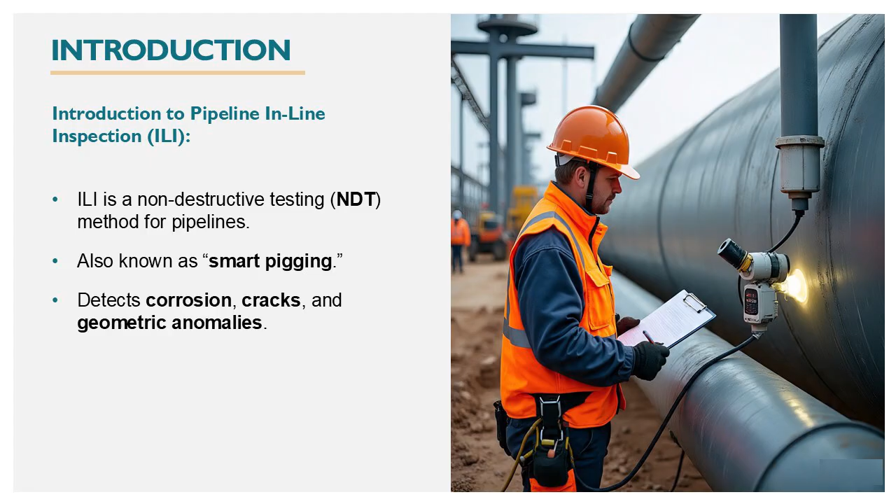Why pipeline inline inspection, or ILI, matters: ILI helps us identify potential issues before they become critical. It's not just about safety, it's also about cost efficiency and regulatory compliance. Early detection means fewer shutdowns and better planning.

Key point number 1: ILI helps to prevent pipeline failures and environmental hazards. It helps detect early signs of corrosion, cracks, or deformation that could lead to leaks or ruptures. Preventing these failures protects the environment, avoids costly cleanups, and ensures public safety. Pipeline failures can be catastrophic, causing explosions, oil spills, or gas leaks. ILI helps us catch problems early, reducing the risk of such incidents. It's a key part of our safety and environmental protection strategy.

Key point number 2: ILI helps to ensure pipeline integrity programs comply with safety regulations. Regulatory bodies like PHMSA, API, and local authorities require regular integrity assessments. ILI provides documented evidence of pipeline condition, helping operators meet legal and industry standards. Governments and industry bodies mandate regular inspections, and ILI provides the data we need to demonstrate compliance. It also helps us avoid fines, shutdowns, and reputational damage.

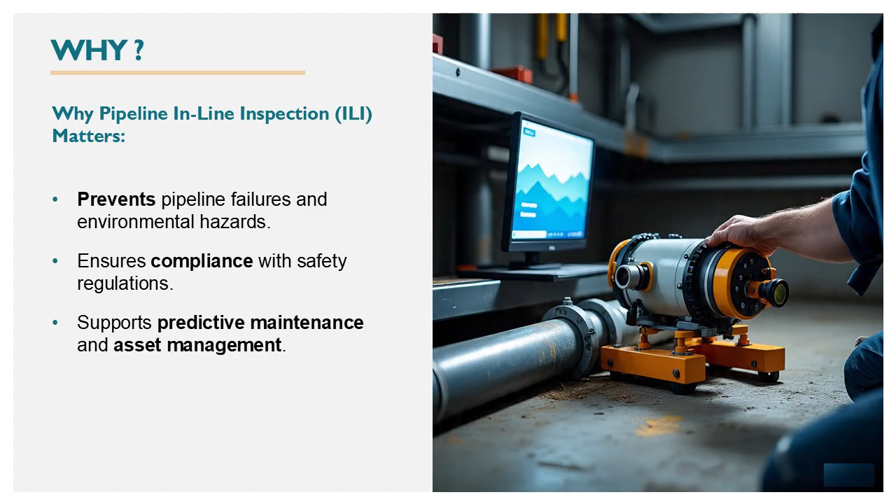Types of pipeline inline inspection tools: different tools serve different purposes. MFL is great for corrosion, to detect metal loss. Ultrasonic testing, or UT, measures wall thickness and cracks. Caliper tools are used for geometry, to identify dents and deformations. Electromagnetic acoustic transducer, or EMAT, and eddy current are advanced tools for crack detection. Choosing the right tool depends on pipeline material, diameter, and inspection goals.

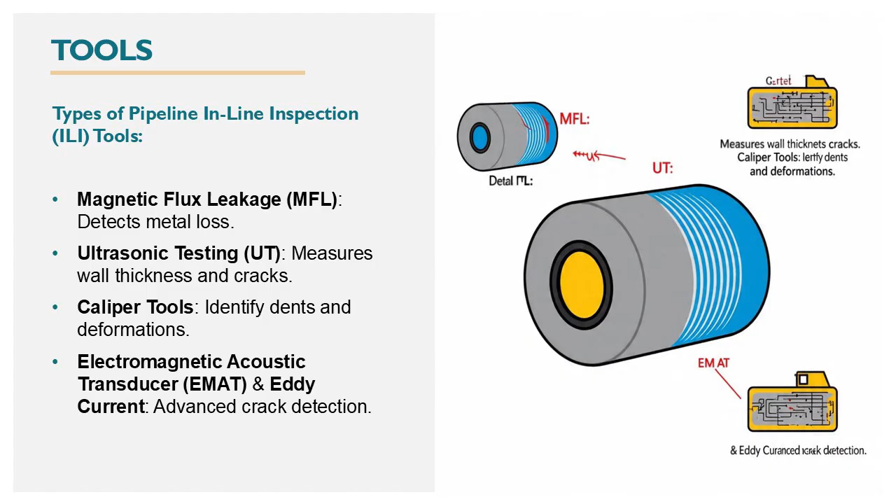For tool type MFL, or magnetic flux leakage: it is enabled to detect defects in the pipeline with a maximum wall thickness of up to 31 mm, able to detect defects such as metal loss and corrosion. This measurement type is called indirect, or magnetic flux leakage. Medium requirement to conduct this inspection is dry or liquid material. Compatibility to measure or detect is ferromagnetic only. The advantages of this MFL inspection method are: fast, well established, and good for corrosion detection. The limitations are limited crack detection and saturation issues in thick walls.

For tool type UT, or ultrasonic testing: it is enabled to detect defects in the pipeline with a maximum wall thickness of 40 mm and above, able to detect defects such as wall thickness, cracks, and laminations.

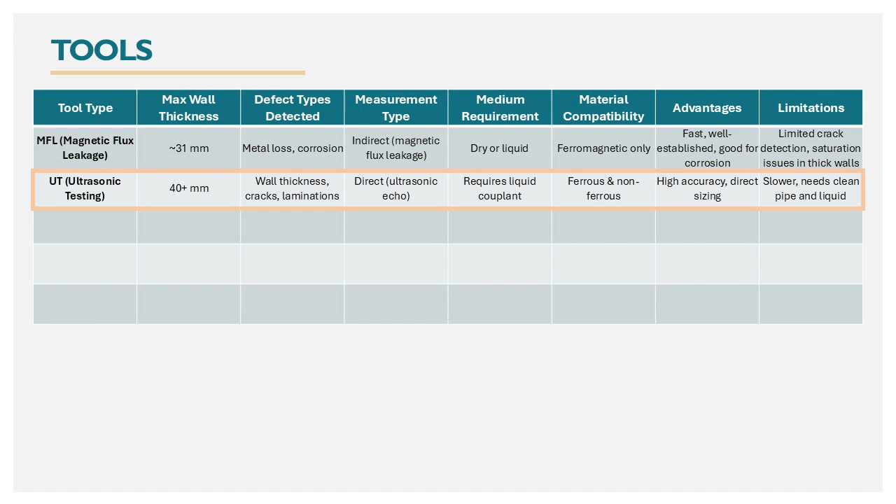This measurement type is called direct or ultrasonic echo. Medium requirement to conduct this inspection requires liquid couplant. Material compatibility to measure or detect is ferrous and non-ferrous. The advantages of UT or ultrasonic testing inspection method are high accuracy and direct sizing. The limitations are slower speed, and it needs a clean pipe and liquid.

For tool type caliper tool, it is not able to detect defects that occur in the pipeline's wall thickness. It is able to detect defects such as dents, ovality, and deformation. This measurement type is called mechanical contact. Medium requirement is any medium. Material compatibility is all materials. The advantages of the caliper tool are simplicity and detecting geometric anomalies. The limitations are that it cannot detect corrosion or cracks.

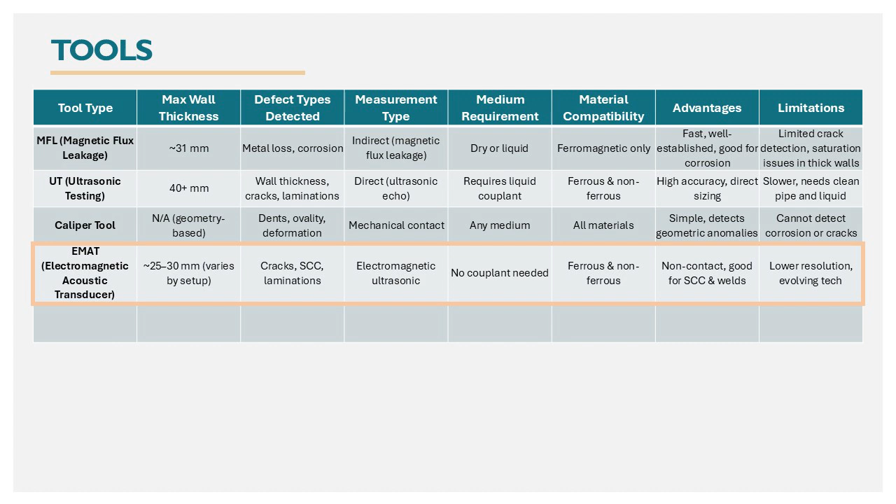For tool type EMAT or electromagnetic acoustic transducer, it is enabled to detect defects in the pipeline with a maximum wall thickness up to 25mm and up to 30mm, varying by setup. It's able to detect defects such as cracks, SCC, and laminations. This measurement type is called electromagnetic ultrasonic. Medium requirement is no couplant needed. Material compatibility is ferrous and non-ferrous. The advantages are non-contact operation and good performance for SCC and welds. The limitations are lower resolution and evolving technology.

For tool type eddy current or EC, it is enabled to detect defects in the pipeline with a maximum wall thickness up to 15% of wall thickness, able to detect defects such as surface cracks, corrosion, and material changes. This measurement type is called electromagnetic impedance. Medium requirement is dry or liquid. Material compatibility is conductive materials. The advantages are sensitivity to surface flaws and no couplant needed. The limitations are limited depth penetration and not ideal for thick walls.

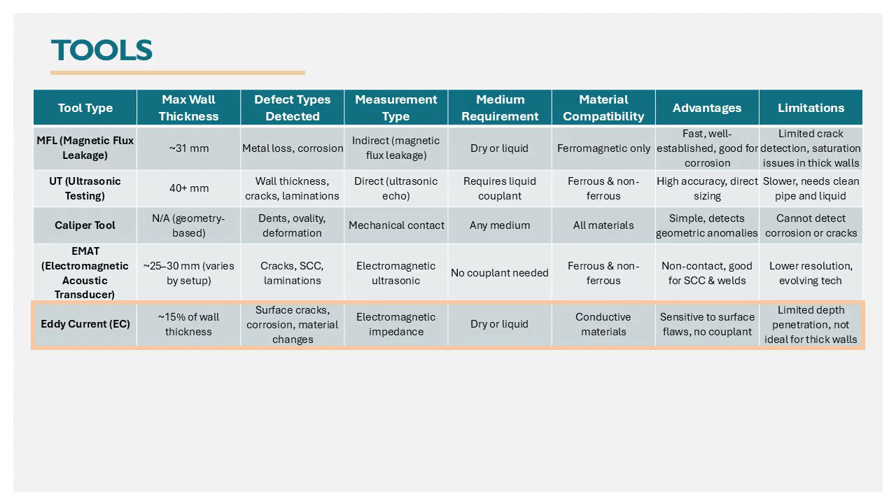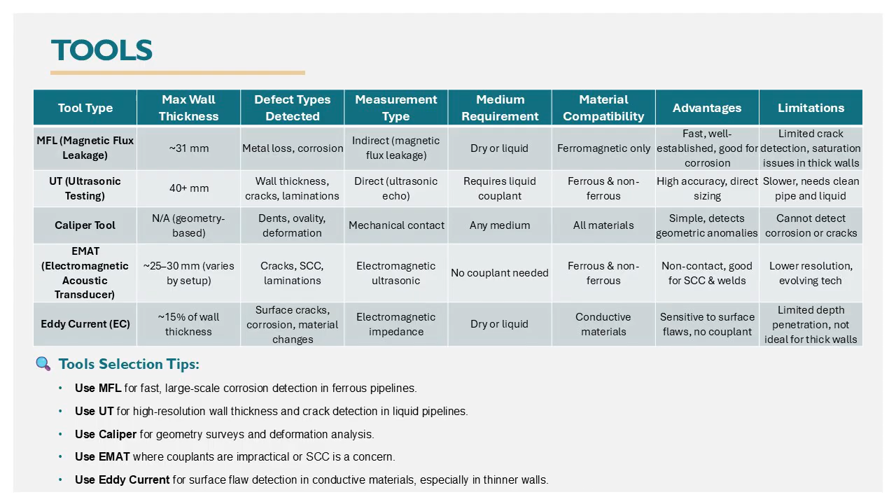According to this table of tools, here are the tips to select the tools. First, use MFL for fast, large-scale corrosion detection in ferrous pipelines. Second, use UT for high-resolution wall thickness and crack detection in liquid pipelines. Third, use caliper for geometry surveys and deformation analysis. Fourth, use EMAT where couplants are impractical or stress corrosion cracking (SCC) is a concern. And fifth, use eddy current for surface flaw detection in conductive materials, especially in thinner walls.

Pipeline inline inspection, or ILI, simple workflow. The ILI process starts with planning and ends with actionable insights. Each step is crucial, from selecting the right pig to interpreting the data and deciding on repairs or monitoring.

Workflow step number 1: pre-inspection planning. Define inspection objectives, review pipeline specifications, assess risks, and schedule operations. Includes coordination with operations and safety teams. This is a critical phase where we define what we want to achieve, whether it's detecting corrosion, verifying pipeline geometry, or assessing integrity after an incident. We also gather pipeline specs like diameter, material, and operating conditions. Coordination with operations ensures minimal disruption.

Workflow step number 2: tool selection and launch. Choose the appropriate ILI tool based on pipeline material, diameter, and expected defects. Launch the tool from a pig launcher and monitor its progress. Tool selection depends on the type of defects we expect, for example, MFL for corrosion, UT for cracks. Once selected, the tool is inserted into the pipeline via a pig launcher. We monitor its movement to ensure it travels at optimal speed and collects quality data.

Workflow step number 3: data acquisition during run. The tool travels through the pipeline, collecting data on wall thickness, geometry, and anomalies. Speed and pressure are controlled to ensure data quality. As the pig moves through the pipeline, sensors collect data continuously. It's important to maintain stable flow conditions; too fast or too slow can affect data accuracy. The tool may also record GPS or odometer data for precise location mapping.

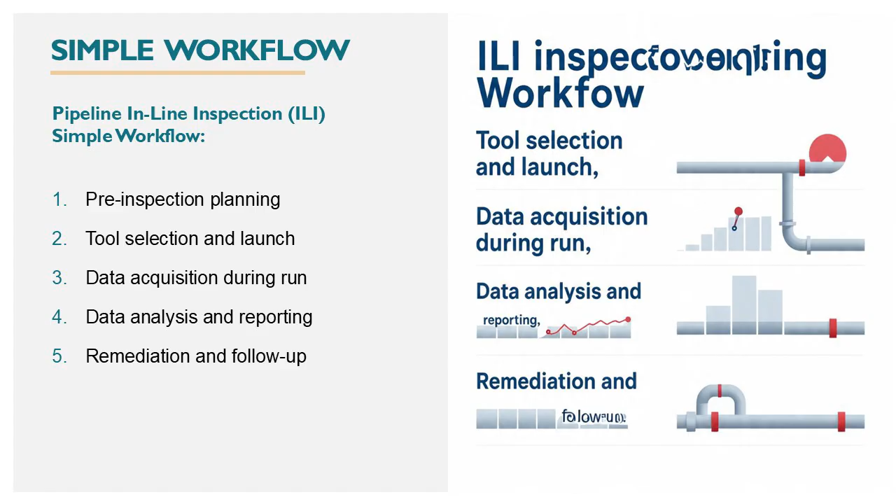Workflow step number 5: remediation and follow-up. Based on findings, maintenance actions are planned, such as repairs, re-inspections, or monitoring. Reports are archived for compliance and future reference. Based on the report, we decide on actions, whether immediate repairs, further inspections, or monitoring. This step ensures the pipeline remains safe and compliant. Documentation is also important for audits and future reference.

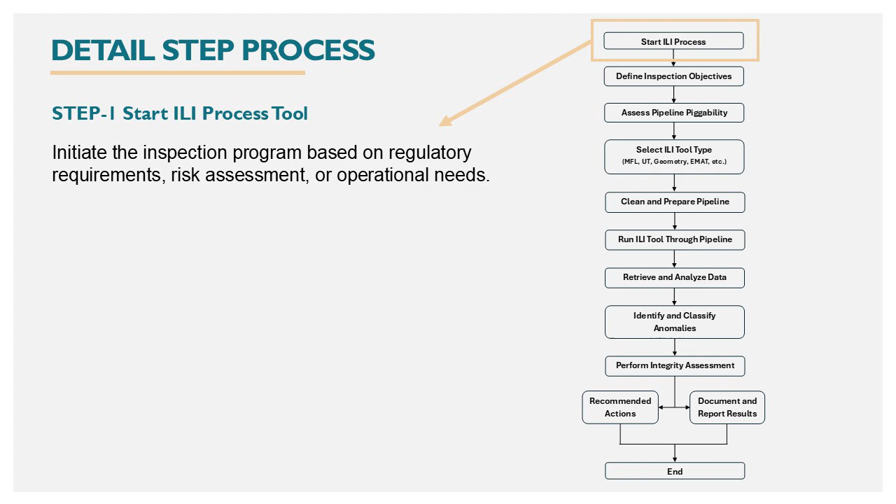Detail step process. Step 1: Start ILI process. Initiate the inspection program based on regulatory requirements, risk assessment, or operational needs.

Step 2: Define inspection objectives. Determine what needs to be detected, such as corrosion, cracks, deformation, and the required resolution.

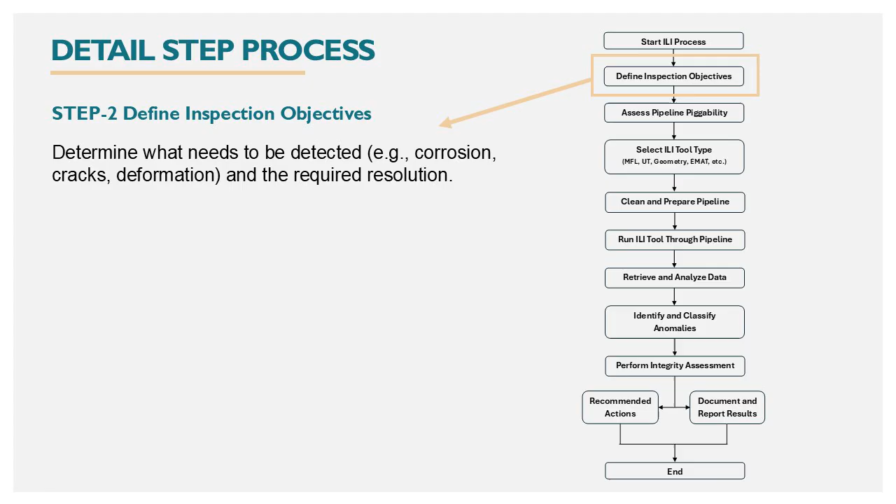Step 3: Assess pipeline piggability. Evaluate whether the pipeline can accommodate ILI tools, considering factors like bends, valves, and diameter changes.

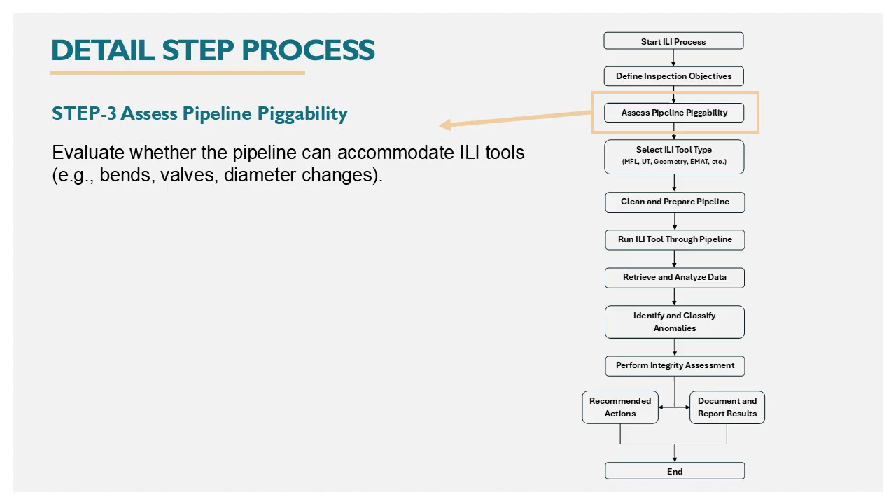Step 4: Select ILI tool type. Choose the appropriate technology: MFL, or magnetic flux leakage, for metal loss; UT, or ultrasonic testing, for wall thickness; EMAT, or electromagnetic acoustic transducer, for cracks; and caliper or geometry tools for dents and ovality.

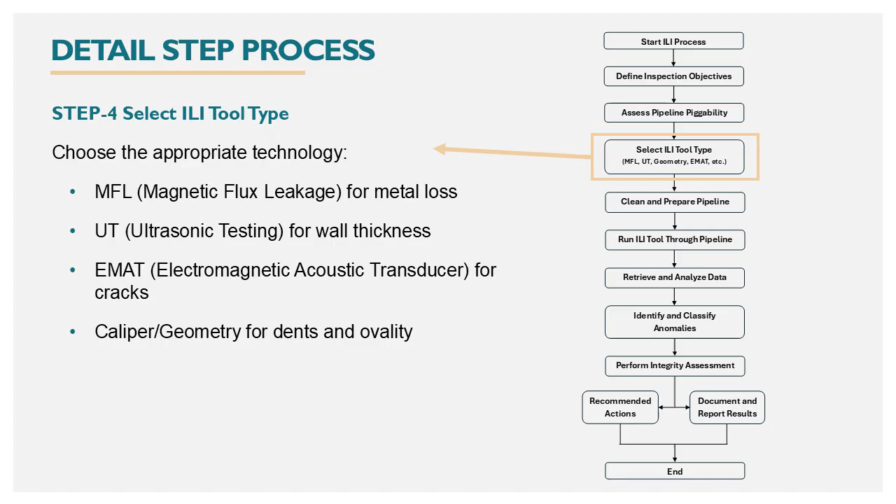Step 5: Clean and prepare pipeline. Use cleaning pigs to remove debris and ensure smooth tool passage.

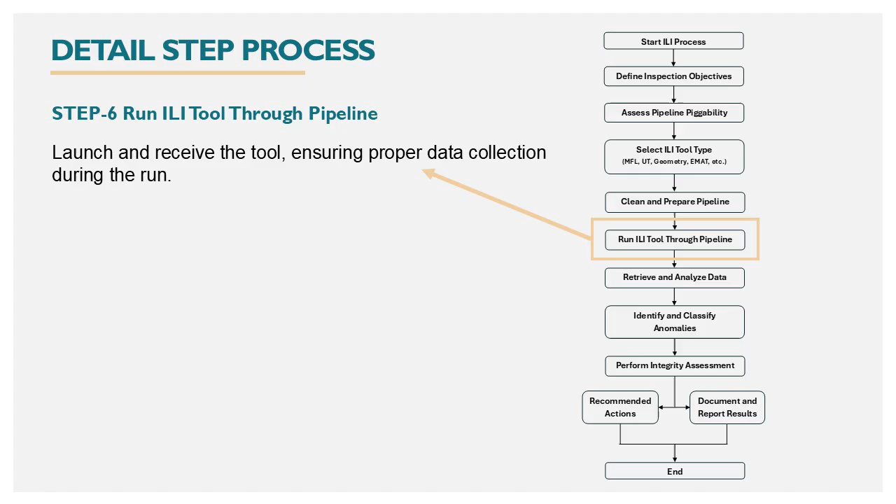Step 6: Run ILI tool through pipeline. Launch and receive the tool, ensuring proper data collection during the run.

Step 7: Retrieve and analyze data. Download and process data using specialized software and trained analysts.

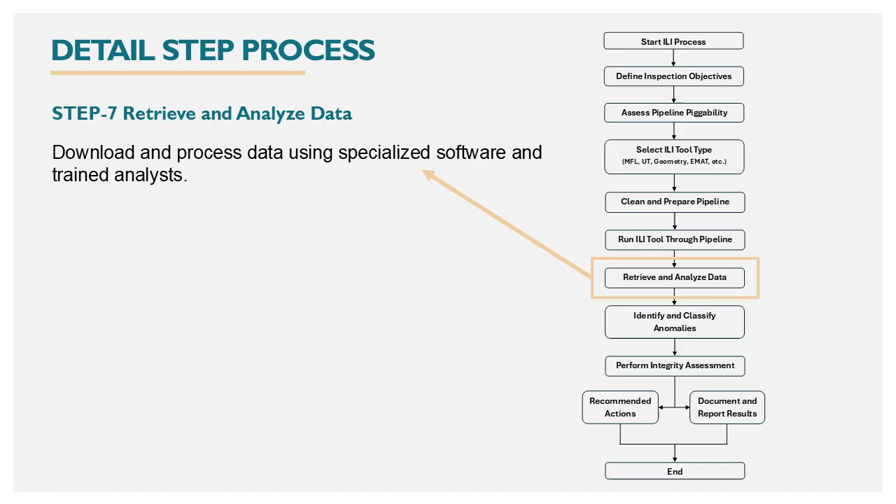Step 8: Identify and classify anomalies. Detect and categorize defects based on size, type, and location.

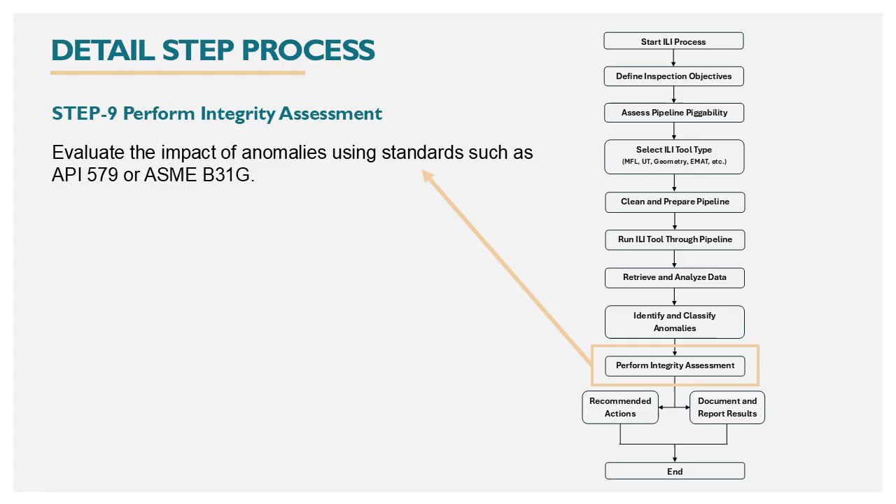Step 9: Perform integrity assessment. Evaluate the impact of anomalies using standards such as API 579 or ASME B31G.

Step 10: Recommend actions, document and report results. Suggest monitoring, repair, or re-inspection based on severity and risk. Compile findings into a formal report for stakeholders and regulatory bodies.

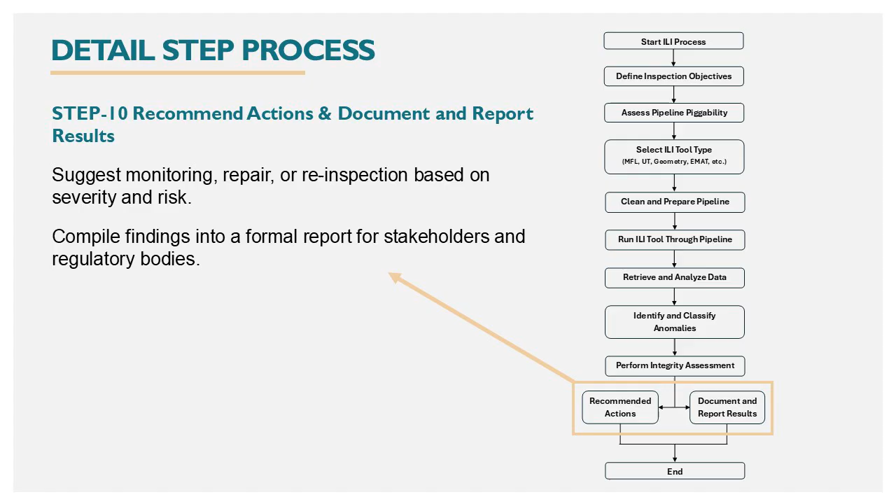Step 11: End process. Conclude the ILI cycle and integrate results into the integrity management system.

Pipeline inline inspection, or ILI, data analysis and reporting. After the pig run, data is analyzed using specialized software. We look for patterns, classify defects, and generate reports that help prioritize maintenance. Accuracy here is key to effective decision-making.

Key number 1: Raw data is processed into actionable insights. Once the pig run is complete, the data is extracted and processed using specialized software. This step involves filtering out irrelevant signals, aligning data with pipeline geometry, and converting sensor readings into measurable parameters like wall thickness or metal loss.

In other words, after the ILI tool completes its run, the collected data, often terabytes of sensor readings, is downloaded and cleaned. Signal noise is removed, and the data is calibrated to match pipeline specifications. This transforms raw sensor outputs into meaningful engineering data.

Key number 2: Anomalies are classified by severity. Not all defects are equally dangerous. We use algorithms and engineering judgment to classify anomalies. For example, a shallow dent may be low risk, while a deep crack near a weld could be critical. This classification helps us focus resources where they're needed most.

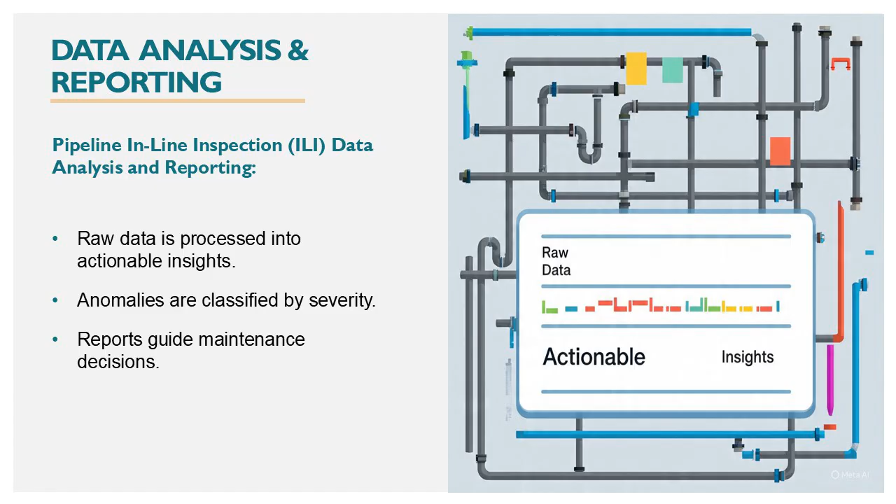In other words, the final report includes detailed maps of defect locations, severity ratings, and recommended actions. These reports are used by integrity teams to plan repairs, schedule re-inspections, or monitor specific areas. They also serve as documentation for audits and regulatory compliance.

Challenges in pipeline inline inspection, or ILI. ILI isn't without challenges. Some pipelines are hard to inspect due to bends or diameter changes. Data can be complex, and remote locations add logistical hurdles. These are areas where innovation is ongoing.

Challenge number 1: Tool compatibility with pipeline geometry. Not all pipelines are piggable. Sharp bends, diameter changes, and complex fittings can obstruct the tool or distort data. In such cases, we may need to modify the pipeline or use tethered or robotic inspection tools.

Pipelines with tight bends, varying diameters, Ts, or unbarred valves can be difficult or impossible for ILI tools to navigate. This limits inspection coverage and may require custom tool design or alternative methods.

Challenge number 2: Data interpretation complexity. The volume of data from a single ILI run can be overwhelming. Analysts must filter out noise, calibrate readings, and interpret signals accurately. Misinterpretation can lead to missed defects or unnecessary repairs.

ILI tools generate massive datasets that require expert analysis. Differentiating between true anomalies and signal noise can be challenging, especially in older pipelines with complex histories or coatings.

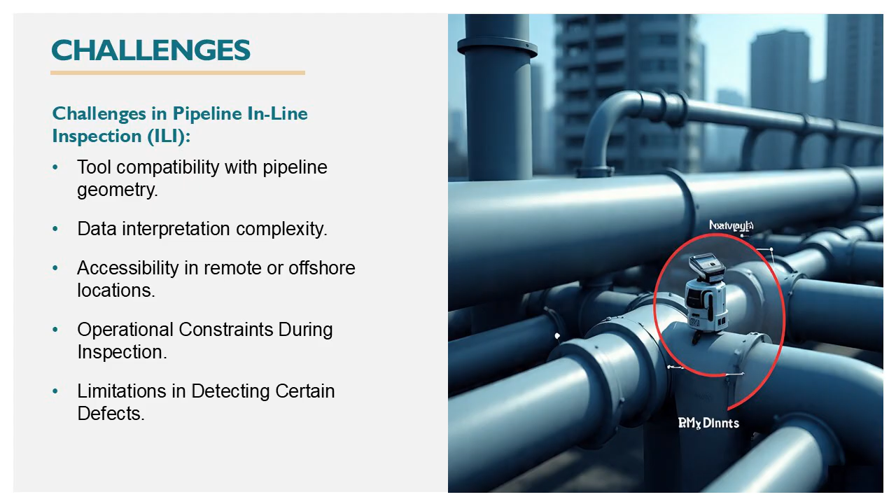Some tools may miss specific defect types. For example, MFL may not detect tight cracks, and UT may struggle with rough internal surfaces. No single tool can detect all anomalies, so multi-tool strategies are often needed.

Future trends in pipeline inline inspection, or ILI. The future of ILI is exciting. AI is improving defect detection, and real-time data allows quicker decisions. Digital twins can simulate pipeline behavior, enhancing predictive maintenance strategies.

Trend number 1: AI and machine learning in anomaly detection. Traditionally, data analysis was manual and time-consuming. Now, AI can scan thousands of data points in seconds, identify patterns, and flag anomalies with high precision. This not only speeds up reporting but also enhances reliability by reducing human bias.

Advanced algorithms are being trained to automatically detect and classify pipeline anomalies from ILI data. These systems can learn from historical inspection data to improve accuracy and reduce human error. They also help prioritize defects based on risk models.

Trend number 2: real-time data transmission. Instead of waiting days or weeks for post-run analysis, some modern pigs can transmit data as they move through the pipeline. This is especially useful in critical infrastructure or emergency inspections, where time is of the essence.

Emerging ILI tools are equipped with wireless communication capabilities that allow data to be transmitted in real time during the inspection run. This enables immediate anomaly detection, faster decision-making, and reduced downtime.

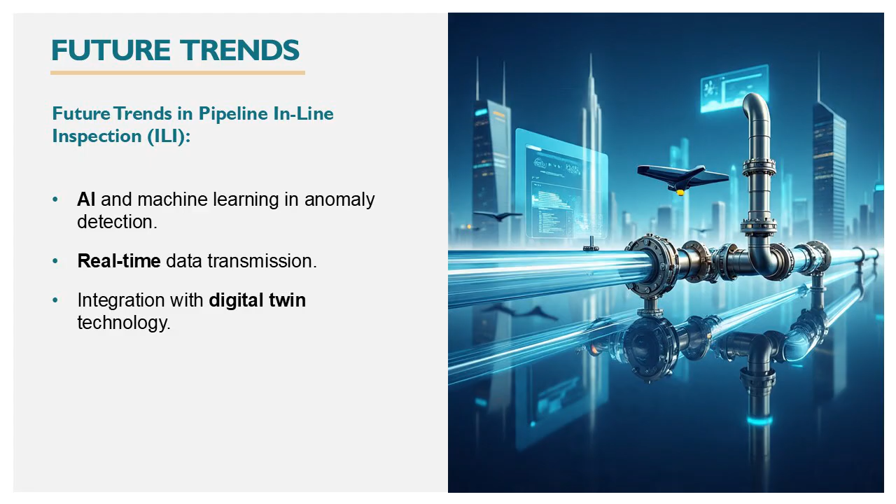Digital twins are virtual replicas of physical assets. ILI data can be fed into these models to simulate pipeline behavior under various conditions. This helps predict future failures, optimize maintenance schedules, and improve asset lifecycle management.

Conclusion of this pipeline inline inspection, or ILI, presentation. Number 1: ILI is vital for safe, efficient pipeline operations. Number 2: continuous innovation is improving accuracy and reliability. ILI is a cornerstone of pipeline integrity management. It's evolving rapidly, and staying updated is essential.

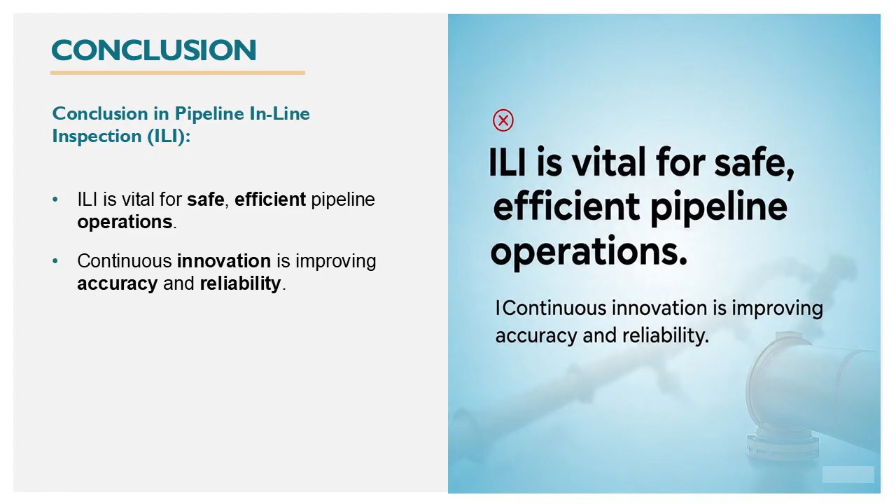Top 10 frequently asked questions about ILI inspection. Question 1: What is inline inspection, or ILI? The answer is, ILI is a non-destructive method used to assess the internal condition of pipelines by running inspection tools or smart pigs through them to detect defects such as corrosion, cracks, and deformations.

Question 2: What types of defects can ILI detect? The answer is, ILI can detect metal loss, for example corrosion and pitting; cracks, for example longitudinal, transverse, SCC; geometric anomalies, for example dents, ovalities, weld misalignments; and coating disbondment, for example with advanced tools.

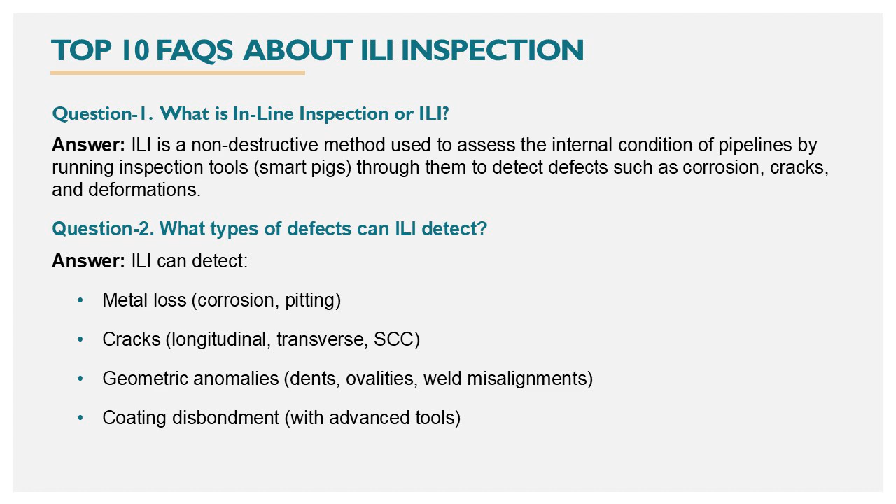Question 3: What are the main types of ILI tools? The answer is, magnetic flux leakage, or MFL, for corrosion detection; ultrasonic testing, or UT, for wall thickness and crack detection; caliper tools for geometry detection; and EMAT and eddy current for advanced crack detection.

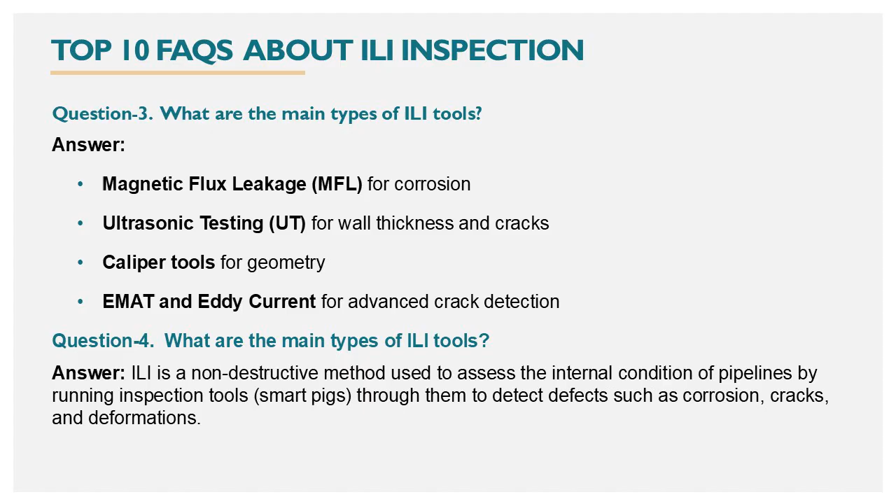Question 4: How often should pipelines undergo ILI? The answer is, frequency depends on pipeline age, material, product transported, and regulatory requirements. Typically, inspections are done every 3 to 5 years, or more frequently for high-risk lines.

Question 5: Is ILI suitable for all pipelines? The answer is, not always. ILI tools require certain pipeline conditions, for example piggable design, minimum diameter, and flow rate. Unpiggable pipelines may need alternative methods like ECDA or hydrotesting.

Question 6: What happens after an ILI run? The answer is, data is downloaded, cleaned, and analyzed. Anomalies are classified by severity, and a report is generated to guide maintenance, repairs, or further inspections.

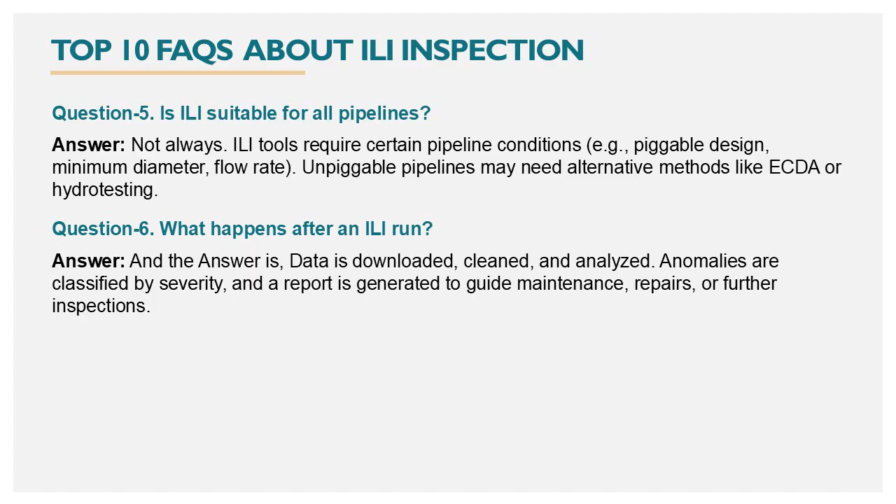Question 7: How accurate is ILI data? The answer is, accuracy depends on tool type, pipeline conditions, and calibration. MFL tools typically detect metal loss with more or less than 10% accuracy, while UT tools offer higher precision for wall thickness.

Question 8: Can ILI detect external corrosion? The answer is, ILI primarily detects internal conditions. However, some tools, like UT and EMAT, can infer external corrosion if wall thinning is detected and matched with location data.

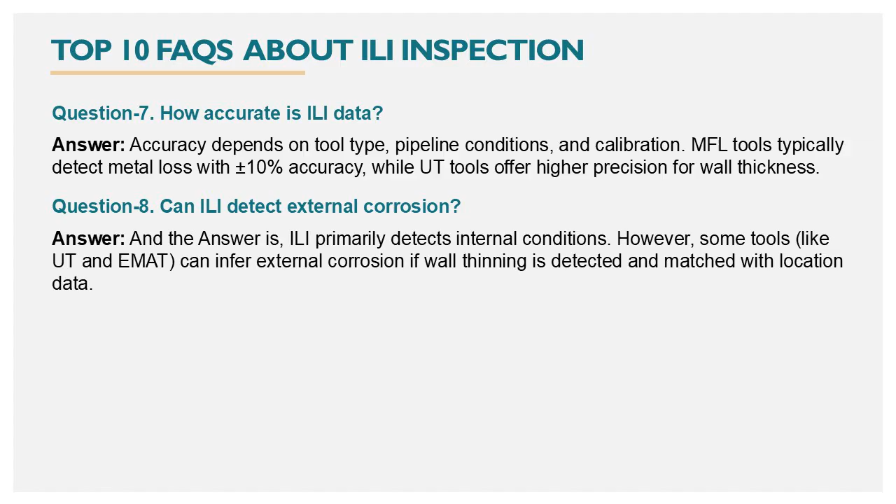Question 9: What are the limitations of ILI? The answer is, limited access in complex pipeline geometries, data interpretation complexity, not all tools work on non-metallic or coated pipelines, and it requires flow and pressure control during inspection.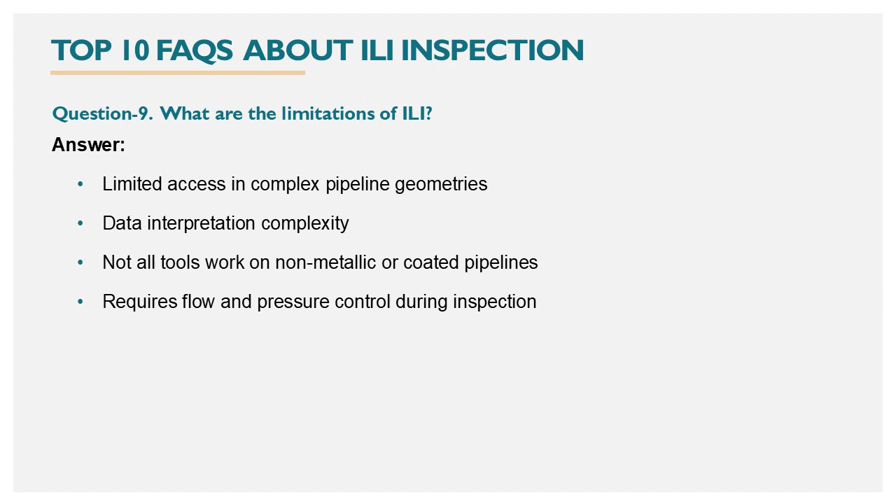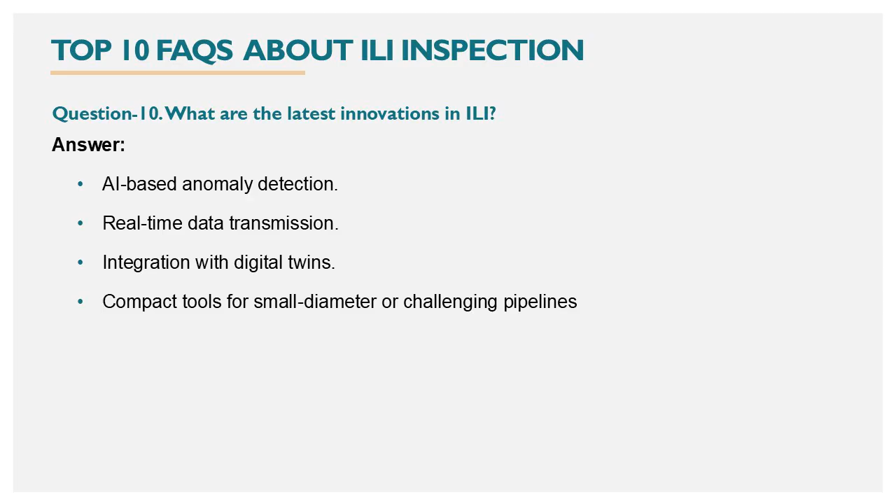Question 10: What are the latest innovations in ILI? The answer is, AI-based anomaly detection, real-time data transmission, integration with digital twins, and compact tools for small diameter or challenging pipelines. Thank you.